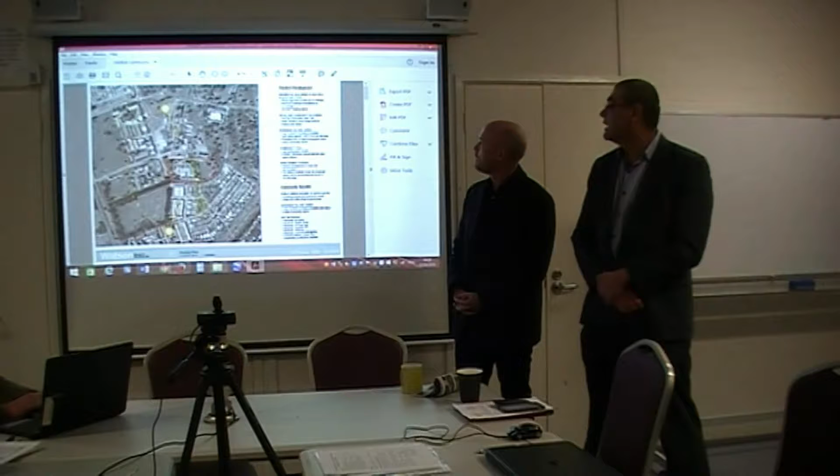This proposal relates to Block 2, Section 64 in Watson. That is the site of the Southern Cross Ten television station, on the corner of Aspinall Street - can I go down again - and Negus Crescent.

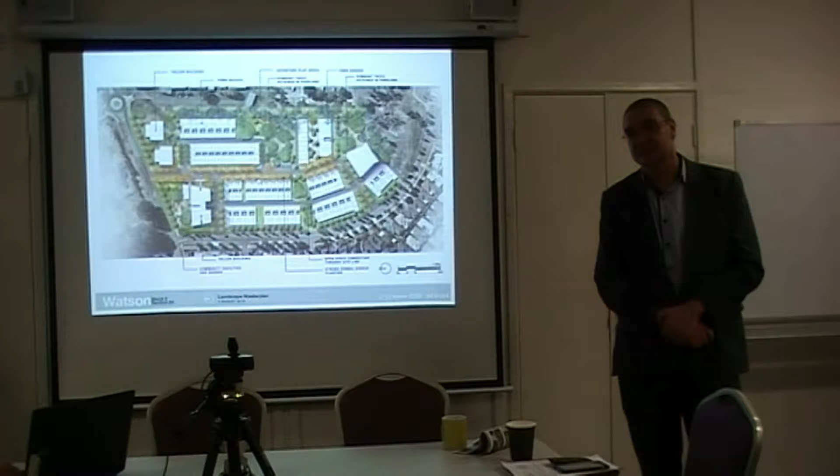The proponent has engaged both Canberra Town Planning and Cox Architecture to start working on this as a mixed-use proposal - I'll say mixed-use, meaning it's primarily a residential development with an opportunity for a little bit of commercial. It's about 4 hectares, currently has a television station as well as some vacant land towards the southern part of that.

I think I'll give Ronan an opportunity to talk to us about that in a second. What we've done to date is start doing some initial design concepts on the site. We had a drop-in session a couple of weeks ago attended by about 40 odd people, which was really good, and we got some really good feedback out of that.

We're currently working through the commentary we received and refining some design ideas. We're planning in about 3 or 4 weeks to be back at the C3 Church in North Watson for a second round of consultation with the community, to display some of the refinements and ideas we have. What we've prepared for tonight is similar to what we did a couple of weeks ago - we thought it was a great opportunity to give you guys an idea of where we are at the moment with the proposal.

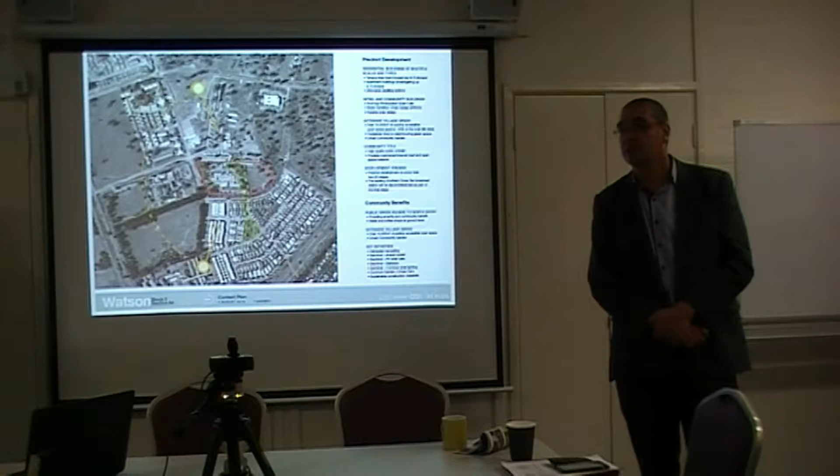So Ronan, if I can kick over to you to have a chat with us. Thanks for having us tonight. My name is Ronan Moss, I work with a company called Cox Architecture. We're working with HTI on this development in Watson.

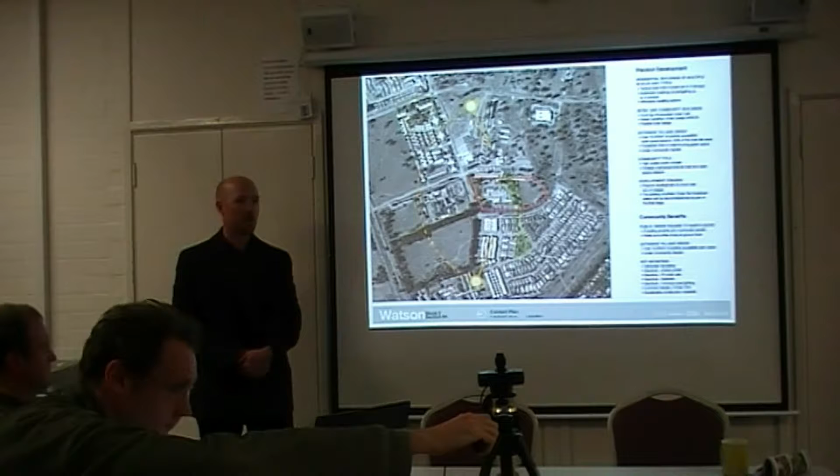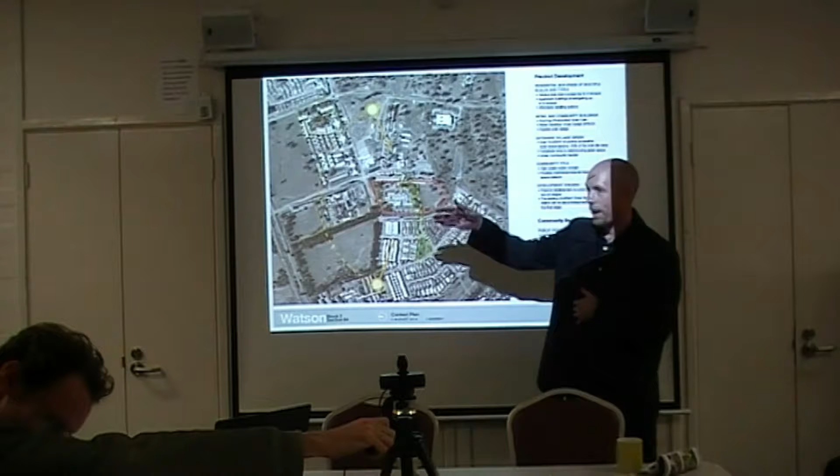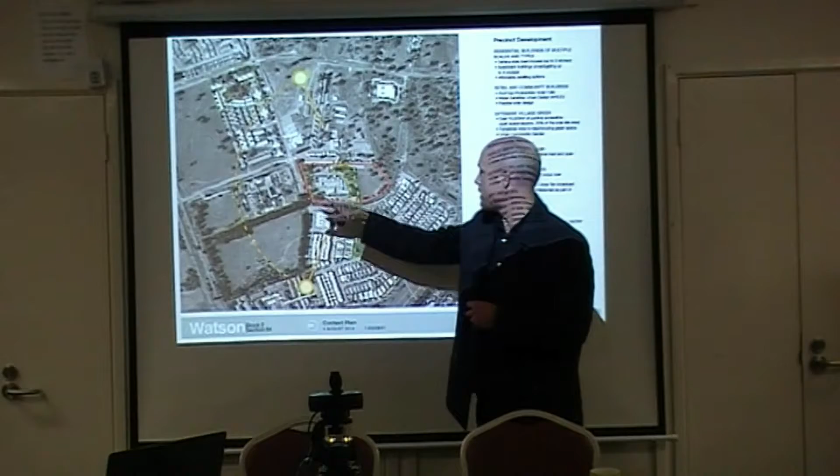Where's the federal highway? Left-hand side, over here. Oh yeah, I can see it. This is the Canberra Southern Cross 10 building - that's where the site is. Everyone know where we are? Yep. Is that top row? Is that Antill Street, Central Street? Yeah, that's Antill - the street's at the top.

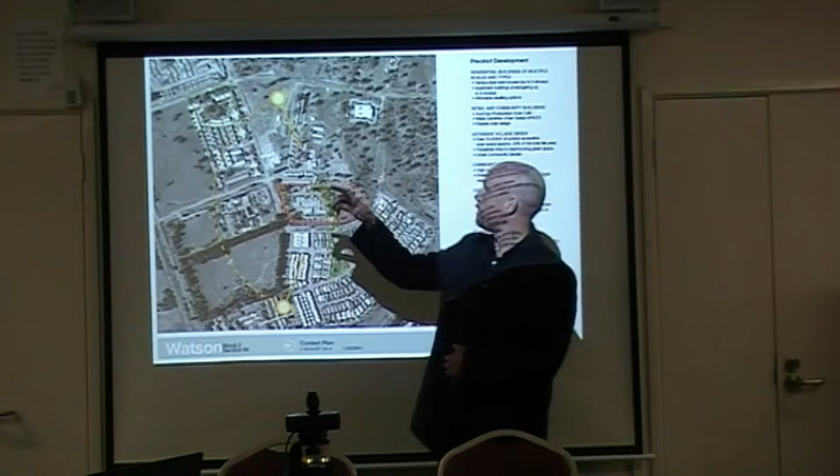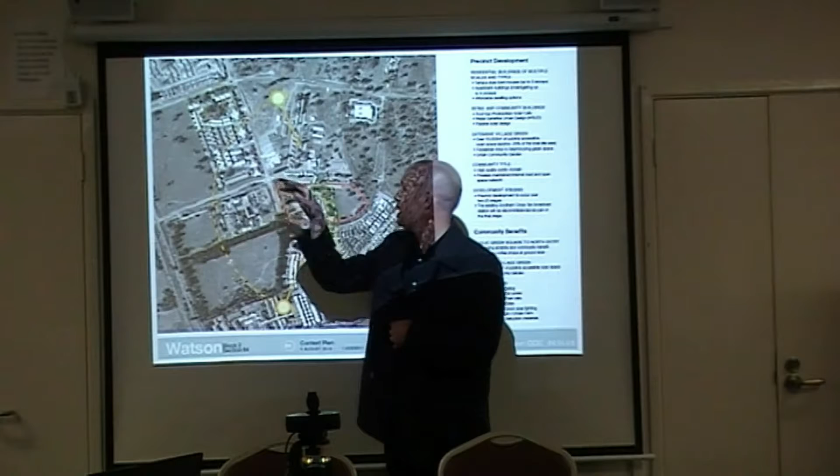To the east we have a development called the Solstice, a mixed-use development with some private open space and public recreation space. But the general area doesn't have a lot of public recreation space. I think one of the key things about this project is that the site has a lot of remnant trees, some very old trees that have been here longer than we have. So the proposal puts forward an idea where we try to retain as many of those trees as possible to create a lot of public open space.

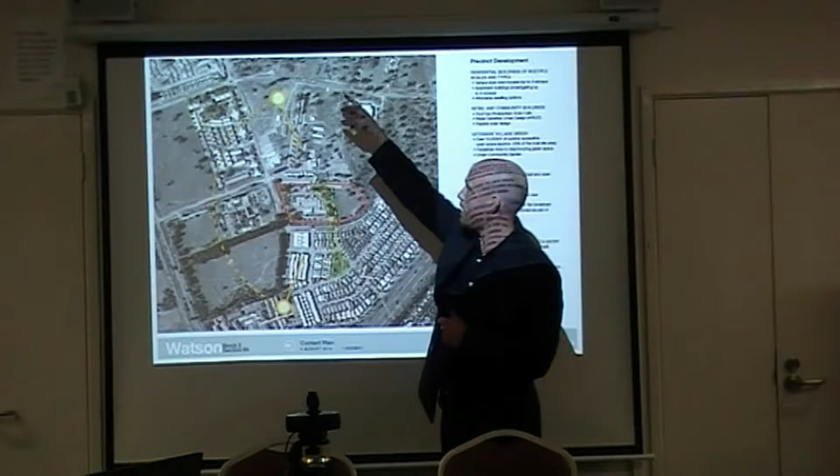A key feature of our development is this east-west connect - there's a natural overland flow path that runs east-west through here. What we're trying to do is link these natural overland flow paths so all the trees are irrigated properly and kept in their natural habitat.

We're actually trying to work with the eastern neighbour, who is also developing - there's another housing development going in to the east, and to the south there's a development as well. So we're working with the eastern neighbour to set up an east-west connect through that overland flow path to allow water to run more healthily. So a few things we should look at is just the density of the area.

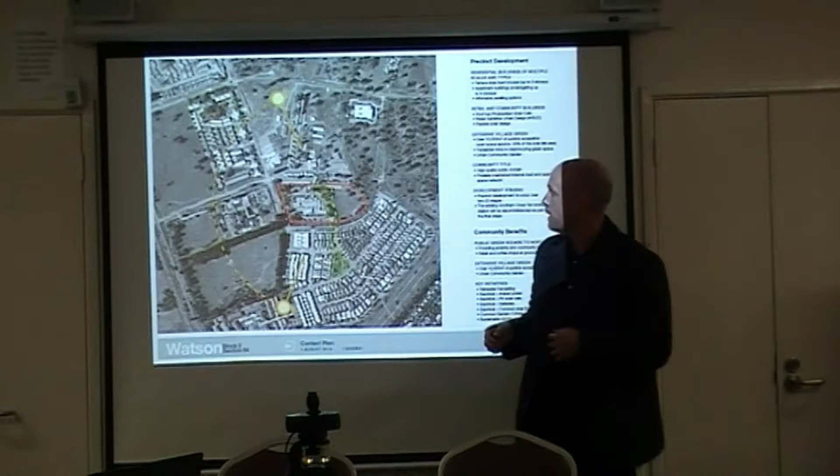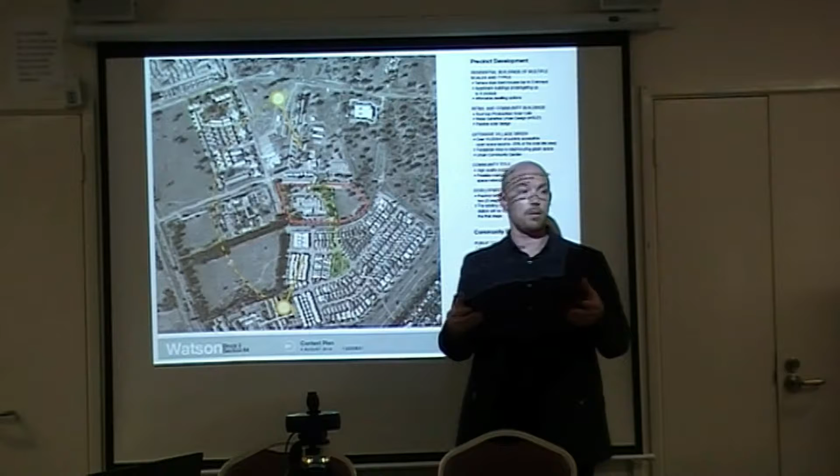So this is a typical suburban subdivision to the west of the site, and you can see that it's quite dense - 2 and 3 story houses, tight streets, generally backed by laneways for garages. The site to the east is more of a mixed-use precinct, meaning it has mixed sizes of buildings - 2 and 3 story houses, but then 4 and 5 story buildings surrounding the park.

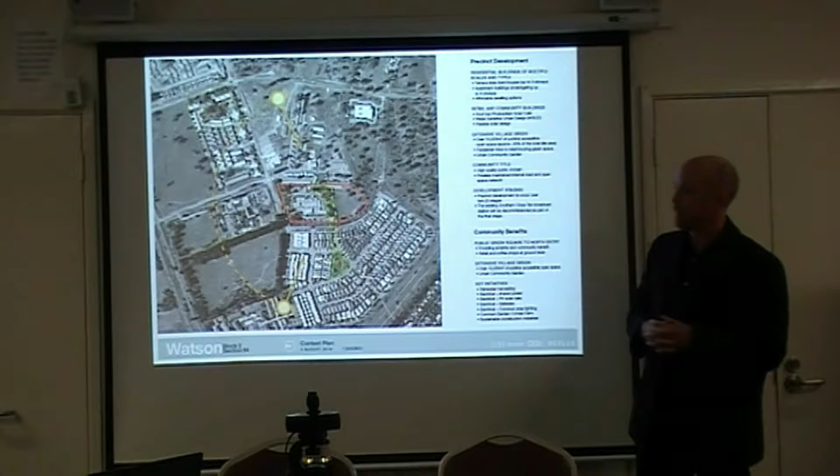So this is our development, or at least the early stages of the proposal. We presented this to the Community Council a few weeks ago. What's really noticeable about this development is that there's a lot of retained open space. When I noted the density of the developments to the west, you'll notice this development is not what you'd describe as a dense development as far as the area of building over the block itself.

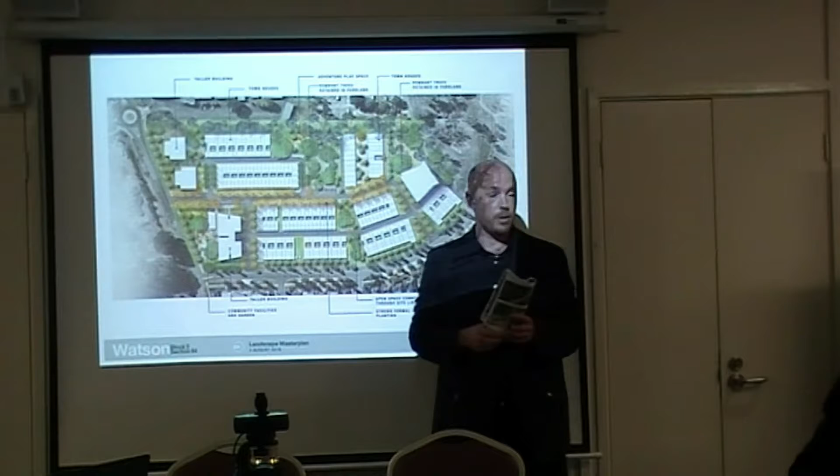There's been a strong desire to retain this east-west connection, this overland flow path, and the site is split up with a north-south road. This road is 20 metres wide, and what's key about that is it forms a really good parking street - you have a carriageway, parking on both sides, footpaths for the kids to play on, and frontages to your building. It's like a city street, so that works well.

To the northwest, we've got a building which is a community building, but also commercial and mixed-use. One of the things about Watson and the area is there's no cafe, no small commercial, no kids play areas. So this development tries to throw in some mixed uses, identifying things missing in the area and supplementing them. In this building there'll be cafe, retail, small commercial. It's north and west facing, so it has great aspect.

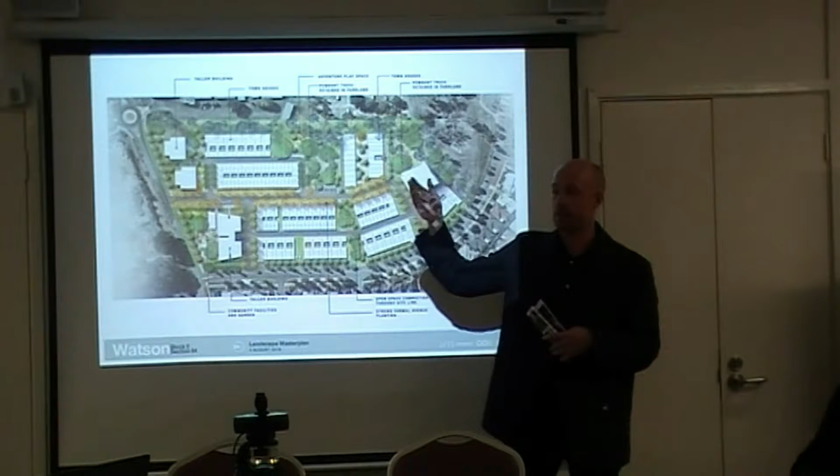You'll see that the site is broken up into a number of different building types, predominantly townhouses, which is what we're familiar with in Watson - if you go around this part of Watson, there's a lot of townhouses. There are a couple of buildings on the site taller than a townhouse, similar in size to what you might find at Solstice, up to the east. We're exploring the heights of those at the moment. Next slide.

This is a really key slide because one of the driving ideas behind this development that HCI have worked on with us is the way in which we're setting up the landscape. The landscape is a key driver. We're working with a company called Oculus - to put you in perspective, Oculus is the company that designs all the public domain works at Acton. They're a reputable company working out of Melbourne typically, and they've come here to do something similar.

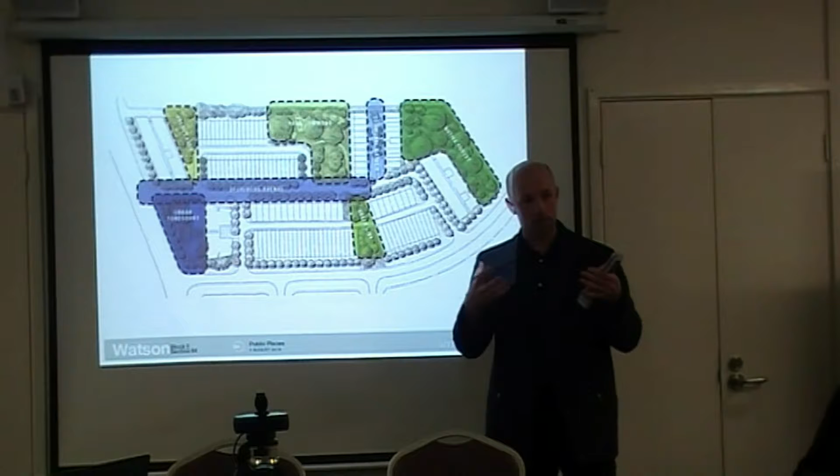It won't be as urban as Acton, but something of a similar quality. I think what's important when you're looking at a project of this size, the quality of the public domain is almost as, I'd argue even more, important than the actual quality of the buildings, because the public domain is the foundation of the buildings. A lot of these types of developments don't work because the footpaths don't work, the garbage is put in the wrong spot, and they just look messy. So working with a good landscape architect is really important.

So these are some of the key moves. There's an urban forecourt, which is the public space with the cafe, etc. Deciduous Avenue is a 20-metre wide street where kids can play on the footpaths which bind the street. There's a green link running east-west.

The Park Commons will have some sort of play space in it - we went to community consultation a few weeks ago, and one of the things they commented on was there's a lot of kids in the area, but nowhere for them to play, so this will be a play space. There's a communal garden between two buildings and a native forest, basically retaining a lot of the existing remnant trees. The total open space on this block is roughly just over 10,000 square metres - it's a 4-hectare site, and 1 hectare is open space. So there's a real drive to make it permanent.

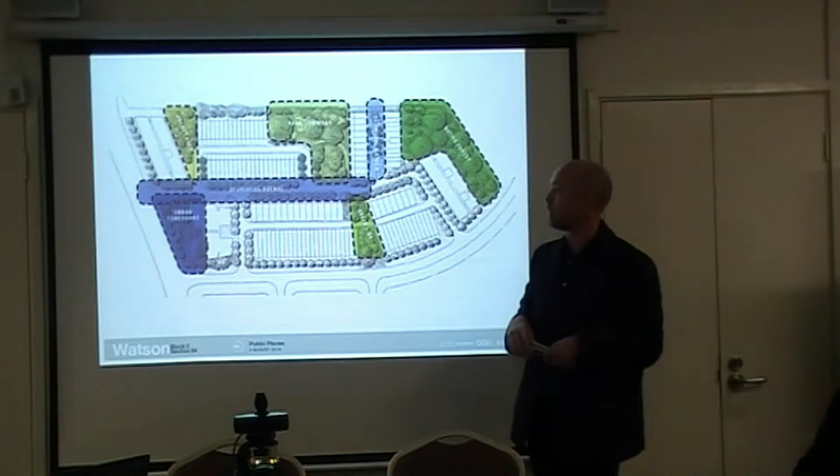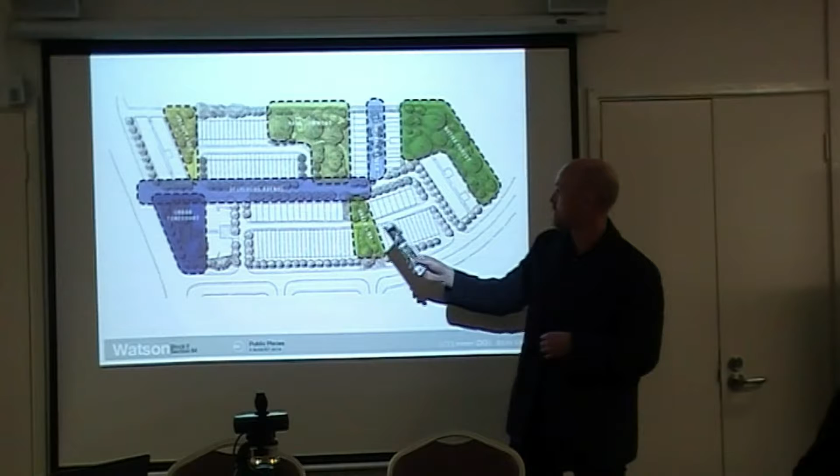The next slides - if you just go back a slide, sorry, just trying to remember where all these things are. This is the urban forecourt, this is the pocket park, Park Commons, Deciduous Avenue, Green Link, communal garden and native forest, because the next slides are just small precedents around those areas.

So this is the precedents for the housing, and these are townhouses. The first thing you should recognise is what you're seeing is a very domestic scale of building, similar to what you might find in Watson at the moment. What's curious is you're seeing typically 2- and 3-storey buildings, tightly designed, with vertical 3-storey elements mixed with 2-storey elements. This building, for instance, of a nice residential scale, is 3 storeys. So the mixture of 2 and 3 storeys in townhouses can be done very successfully, and it doesn't need to seem overbearing as far as height's concerned.

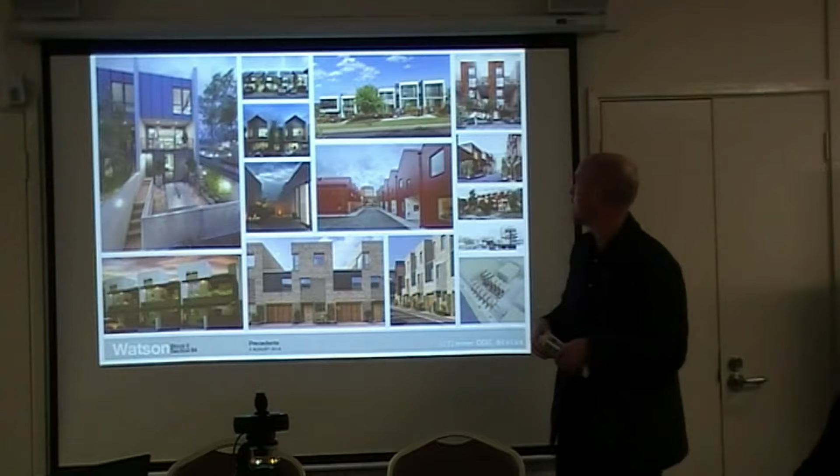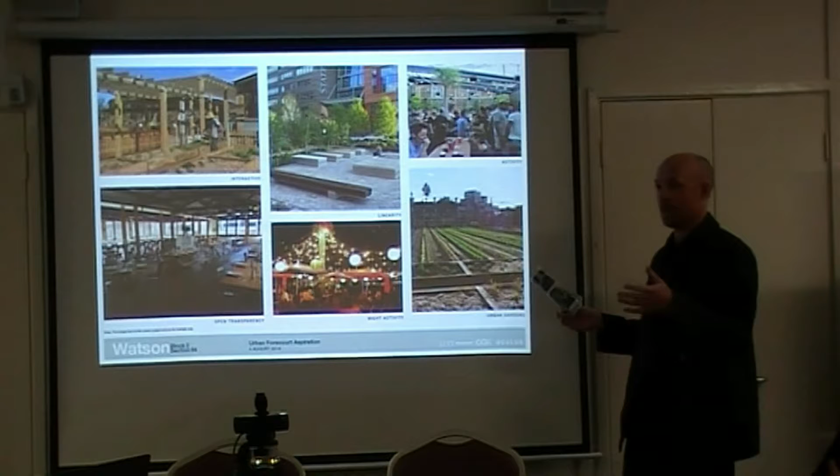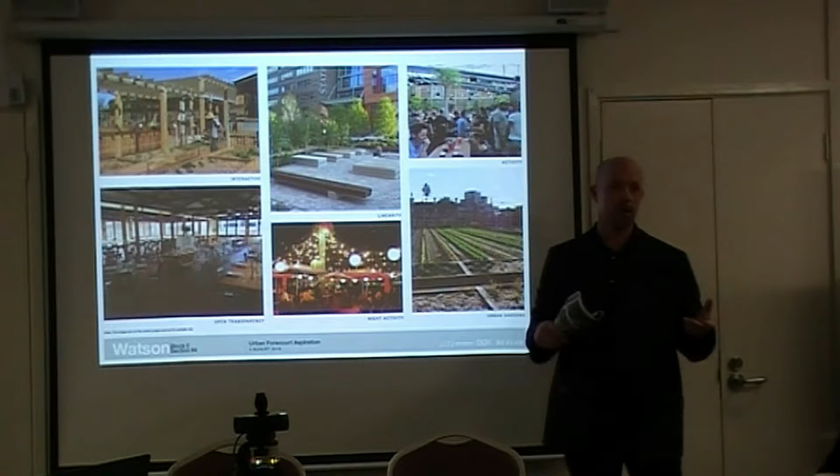This is looking at the urban forecourt aspiration. The urban forecourt is the public space on the northwest. Oculus were looking at setting up an urban farm, but we can't do that because the Crown lease doesn't have an agriculture allowance, so we're not doing the urban farm anymore. But there will be a community garden space, a spot that typically the restaurateurs will use to make their food, and I'm sure there'll be opportunities for residents to use it too. You can see the precedents they're going with - they're interested in some sort of activity, interactive and communal, a place you can be.

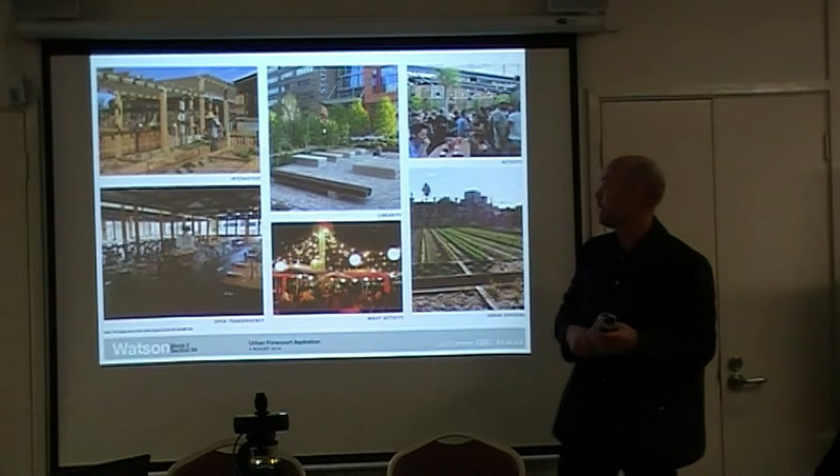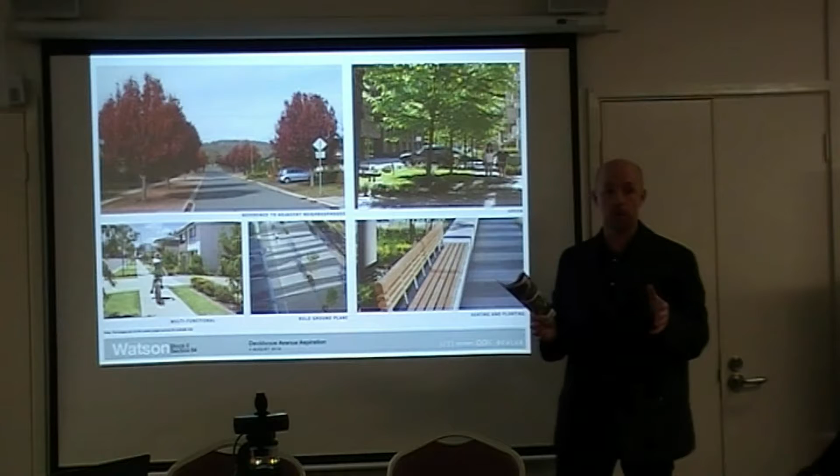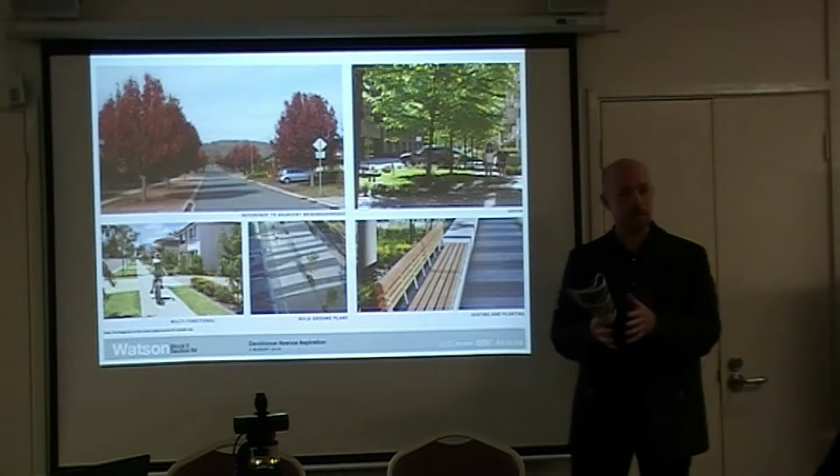This is the deciduous avenue, the 20-metre street. What's key is that a 20-metre street, like I said before, allows for parking, footpaths, and seating. They're generous streets where you can have full growth, mature trees growing on them. There are some streets built in the area, part of what we call a community title, and they're very tight - there's no space for footpaths, you have to walk on the verge. So this 20 metres allows for a lot of space.

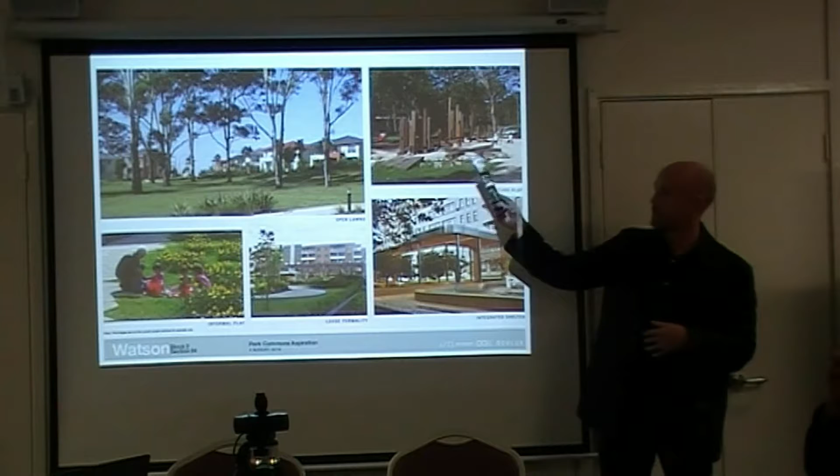Communal garden - this is one of the communal gardens between the two buildings.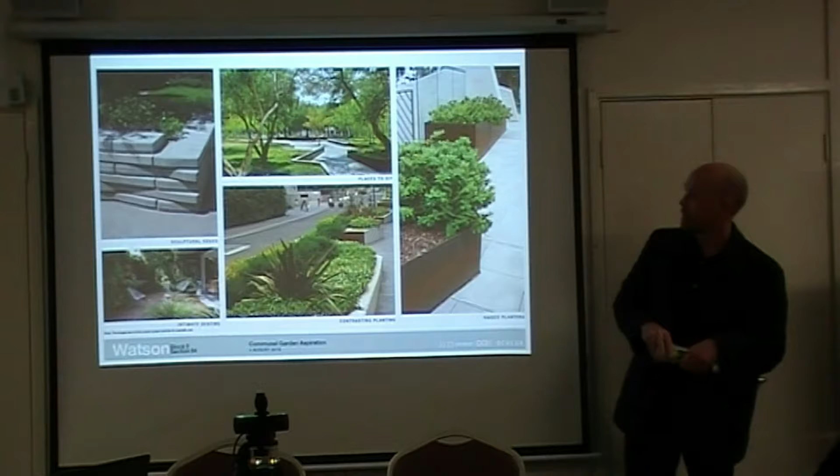Native forest is towards the back of the site, where there are a lot of trees of this scale. They're being retained, with landscaping set up around them so residents and community members can move through. We're talking about 10,000 metres of space here, so it's big - there's a lot of open space, and a desire to incorporate things so people can sit there, use it, and appreciate it.

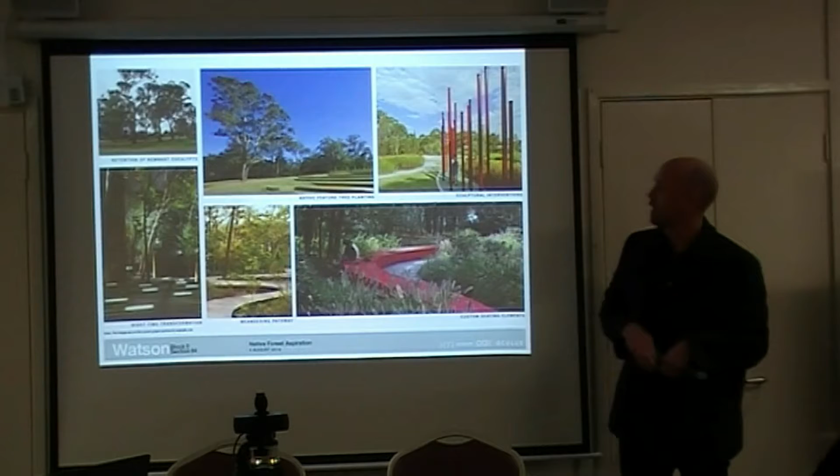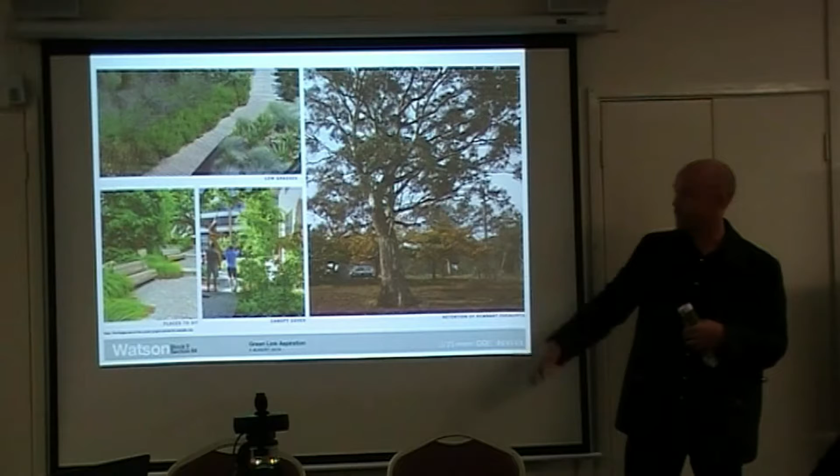And sort of are properly looked after, etc. I think that's the last slide. Oh, these are the indicative trees.

This is not my area of expertise, I've got to say, but what you have is a series of trees which will be well thought through and planted. And which ones might be invasive, potentially? As I said, it's not my area of expertise. So this is the slide that the landscape architects put forward, and he would have thought very carefully about that. But actually, what he did say is this guy here.

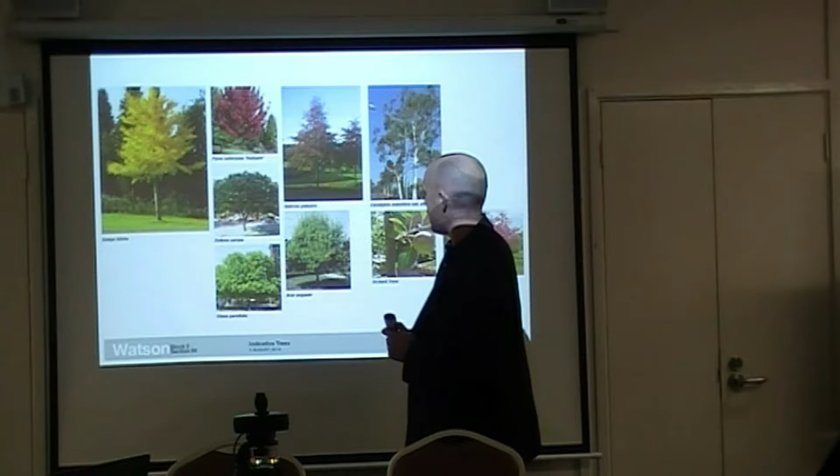The Zelkova serrata is a tree that you find on Torrens Street in Braddon. If you're interested, it's a very hardy tree, so the 20-metre street will be lined in the Zelkova serrata. It can be pruned, it can sort of work well. The issue with some of these gums, especially some on the site at the moment, is they have an issue with falling limbs. So we have to be mindful that if the main street is being used by kids riding their bikes and stuff, the trees need to be hardy and not drop limbs.

The common name for Eucalyptus mannifera subspecies maculata is brittle gum. Okay, good. So it'd be nice to see some more. It'd be great if someone could interpret this slide for me.

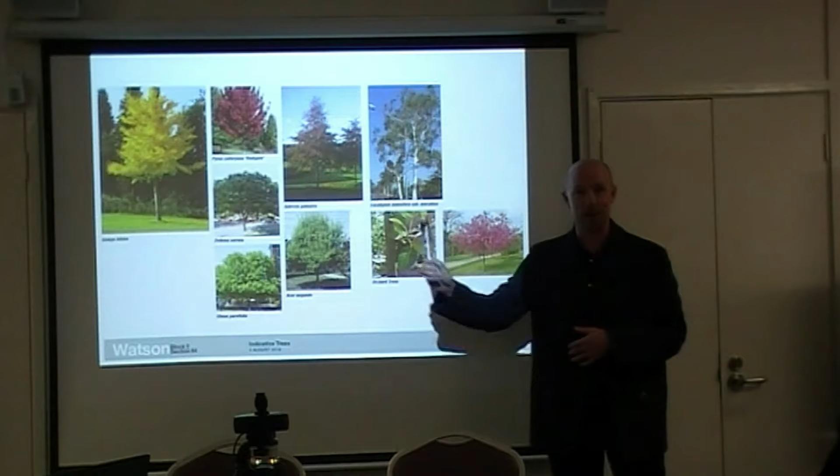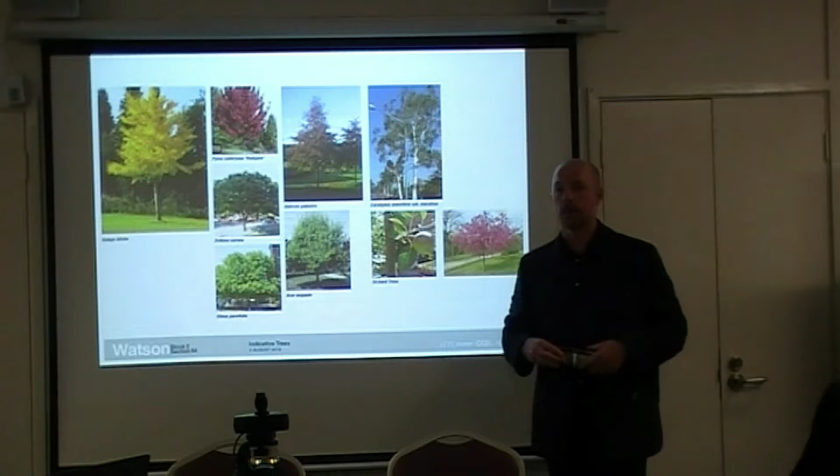My question related to, could you please ensure that there are no invasive introduced species? There's nothing invasive there. None of them are invasive? Yeah, I know my gum trees better than I know them. Okay, but I think that's a good point, we'll make sure.

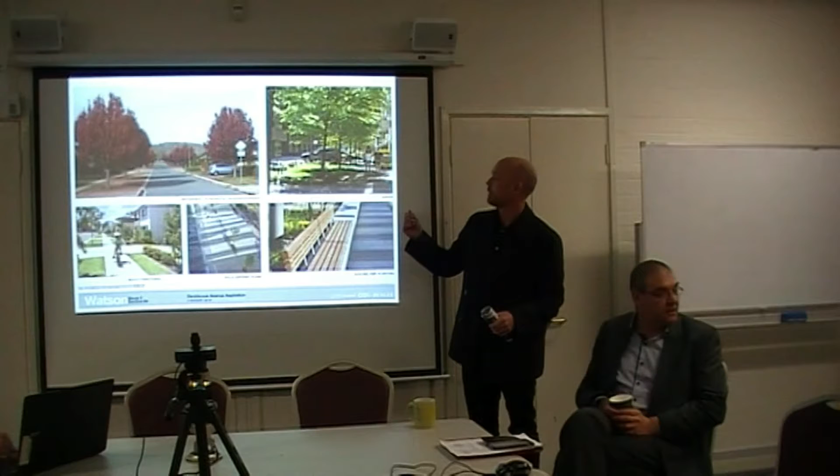What is the zoning of the site? It's only in CZ6. No residential outside, it's in CZ6 as leisure accommodation because there's a prohibition on residential being turned off. It's got, on the Watson Precinct Code, a specific overlay removing residential opportunity across the site.

So that specific overlay, when was that created? Before the current plan, this dates back to probably about 2004, which I think really was changed. It's been there for just about as long as I've been in Canberra.

So just one other thing, I should quickly go through the community benefits, because HCI is looking at doing a lot for the community with this project. There's obviously the public green square to the northwest, over 10,000 metres of publicly accessible open space, and an urban community garden which is part of the public forecourt. These are some really interesting initiatives which we should all be mindful to listen to.

Rainwater harvesting, electrical shared power, electrical PV solar cells, the use of batteries, common area lighting, common garden urban farm, and sustainable materials. I'm not sure if you're familiar with the projects HCI have done, but they're a fairly new company. There are 2 projects they're doing at the moment, and they're worth checking out.

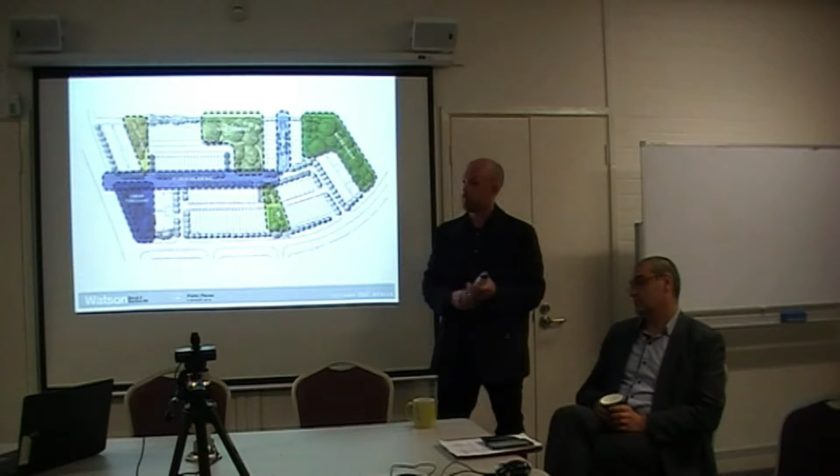Okay, look, I'm conscious of the time, so I just want to check, well, okay, lots of questions. Let's see how fast we can go. Neil?

I'm a layperson, but just looking at the design of your buildings quickly, are they all basically - you've got tall buildings on the north side, and most of the other buildings seem to be facing east-west, is that right? What's interesting is when you design a house, typically, if you face a house due north, one side gets sun and the other doesn't, and everything behind it doesn't get sun. When you face a house east to west, it gets sun in the morning, the courtyard gets sun at midday when facing north, and then it gets sun in the afternoon. So an east-west facing house is actually really efficient because you're getting, over that sort of 3 hours of direct sunlight.

So you've got some north-facing ones around that communal garden. This one here, yeah, absolutely dead north. And so why couldn't you get the rest of them facing the same? Well, because what we're doing is this.

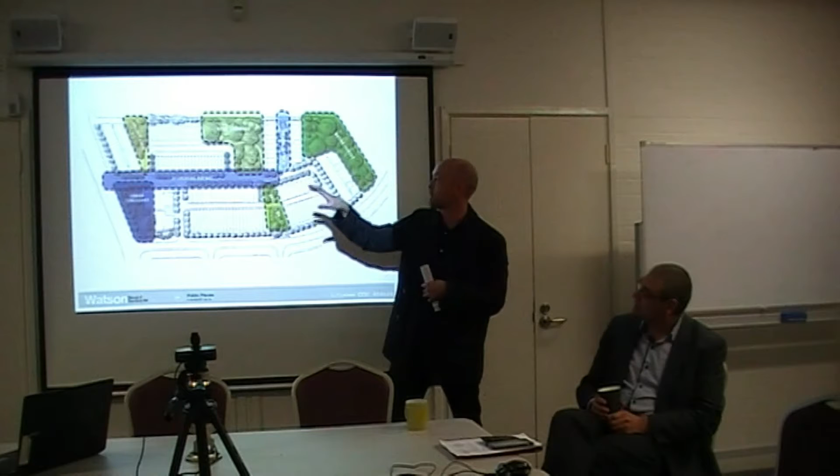What's really important about this particular diagram is these buildings fit within the landscape. We could have taken another approach and mowed down the landscape to fit the buildings in a particular way, but instead they're organised to fit within the landscape. This area works extremely well because the Park Commons has some very old remnant trees in it.

There's been a lot of thought about how we retain the landscape and how the buildings respond to that, but also on the question of solar, so that every dwelling gets a lot of sunlight. And the 8-storey buildings don't.

So there's no 8-storey buildings. One of the things we got out of our last community consultation was an exploration of the concept of height on this site, and one of the things we got out of that was that 8 storeys was probably going to be too high. So that's been reviewed as part of the design review.

What was 8 storeys too high based on? What's the rationale? I think it's based on the character of the area. If you go to the east, you've got the Solstice, which has 4 and 5 storey buildings, or a 4-storey building with 2 storeys on top. That scale of building fits well within the canopy and works. But an 8-storey building starts to hit that high point, and unless they're really well designed...

Okay, is this going to fit within the territory plan as it stands at the moment, or is it going to require changes? No, it's designed to fit within the planning rules.

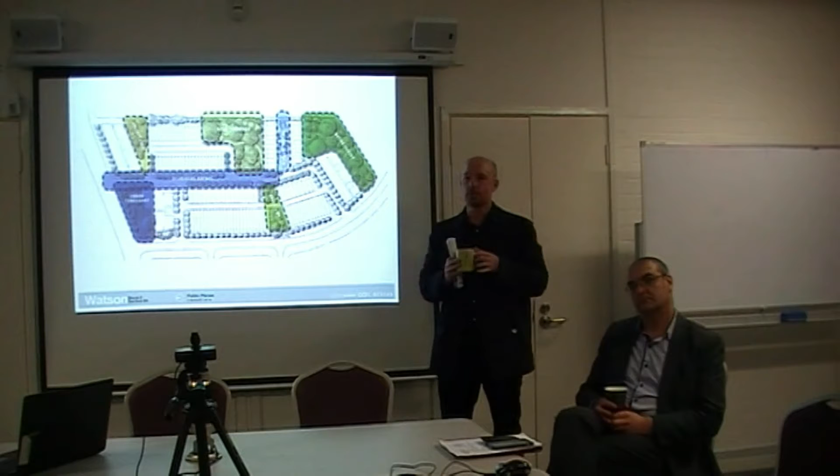My question was similar to the other gentleman's about orientation, that I thought we were aiming for passive solar orientation. If your argument is that it fits better in that particular landscape, well maybe that is the case, but it would be interesting to see the contour map of that site.

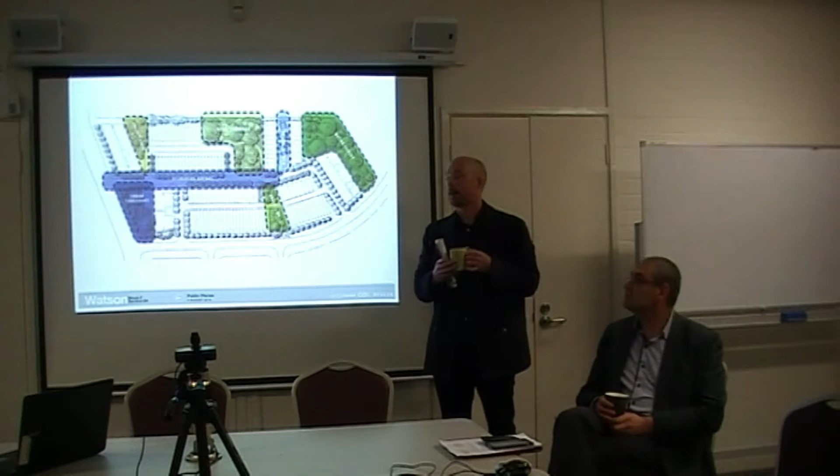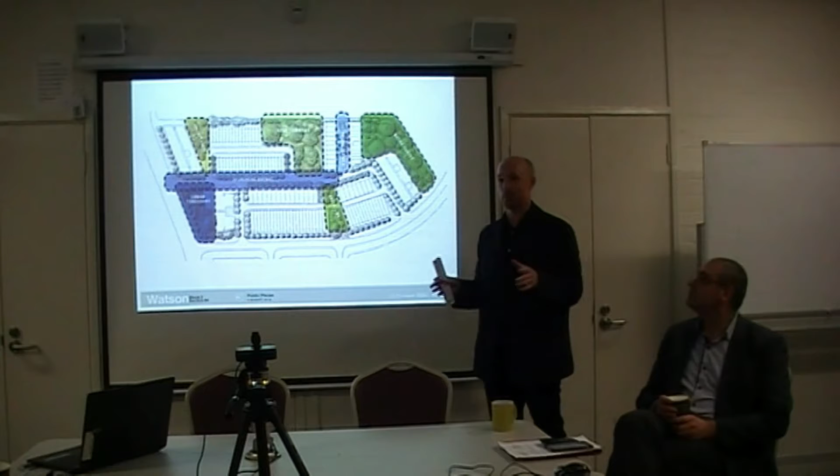Yeah, absolutely, so we're putting together a series of sun diagrams. All the apartments get north. Well, I shouldn't say every apartment, because one doesn't face north, but they've been designed so that the majority face north because they're flat plate apartments. We want them to face north and have that aspect.

All of the townhouses have a central courtyard, so that picks up northern light at midday, and then they've got east and west facing frontages. So the living spaces get morning sun and afternoon sun, and the courtyard spaces get midday sun. They're designed so they're cross ventilated, and designed in a way where you can basically track the sun and move around the house.

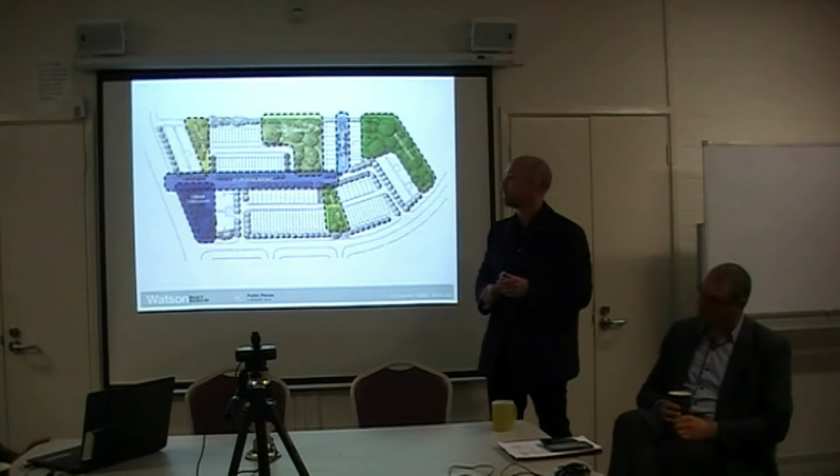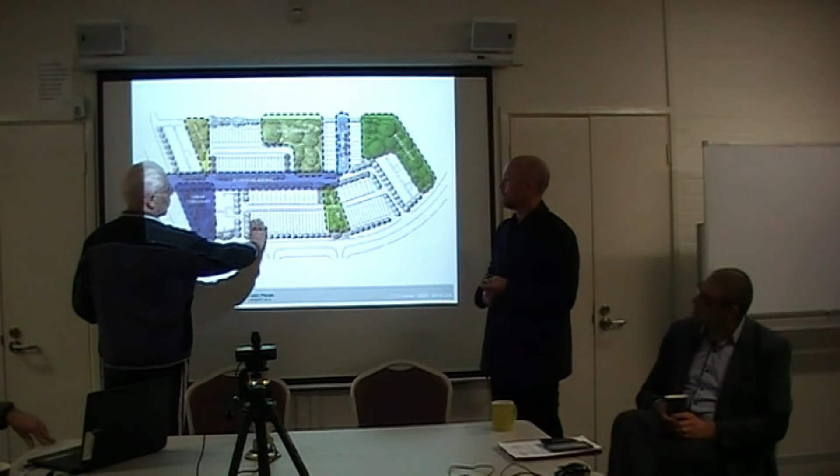Can I just clarify something again, it's solar orientation - are these the townhouses? So they're townhouses, but what's not shown here is that there's a long strip with courtyards in the middle of all of this. So this first house gets the northern sun, but all these others don't get the northern sun - they get a little bit of sun in their courtyard.

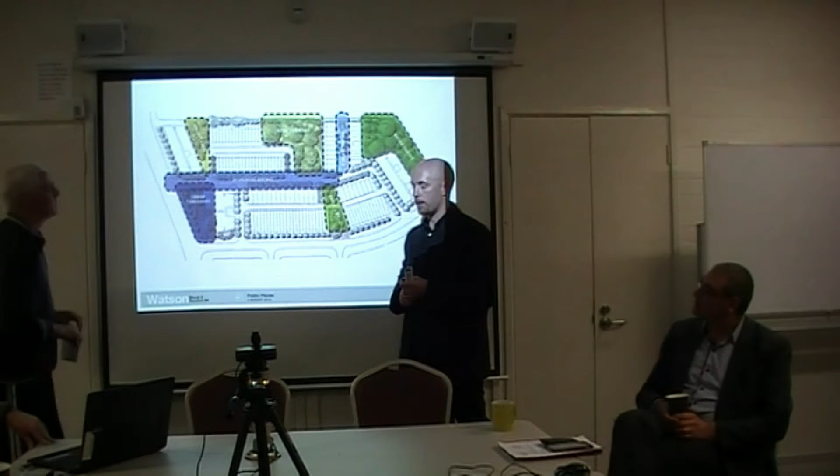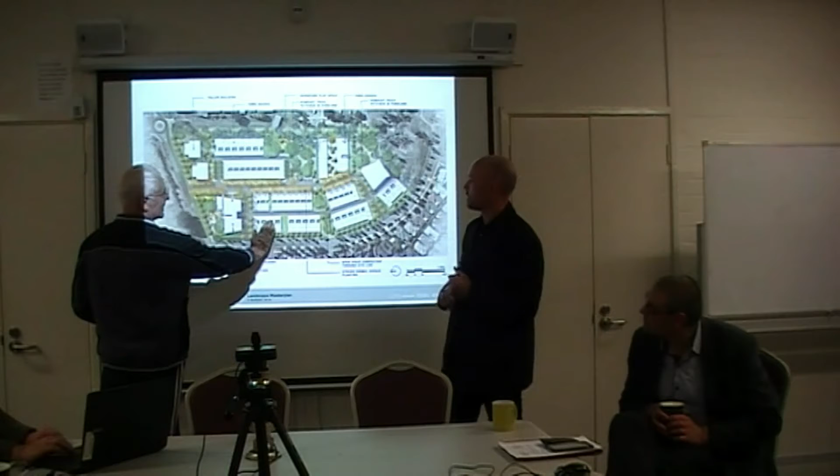Maybe go back a couple slides, or back one more slide. Yeah, so this is what it looks like. So these are two-storey buildings? Two-storey, correct, yeah. So they were getting northern sun in winter? That's correct, yeah. What were they getting as far as direct northern sun? I don't know the actual number, but...

All the dwellings get a minimum requirement of 3 hours direct sunlight. So where do they get that? It's an east-west orientation, so the sun rises in the east and sets in the west, and this is north. So they've got living areas facing - run the first slide out. Oh, the first slide? Yeah.

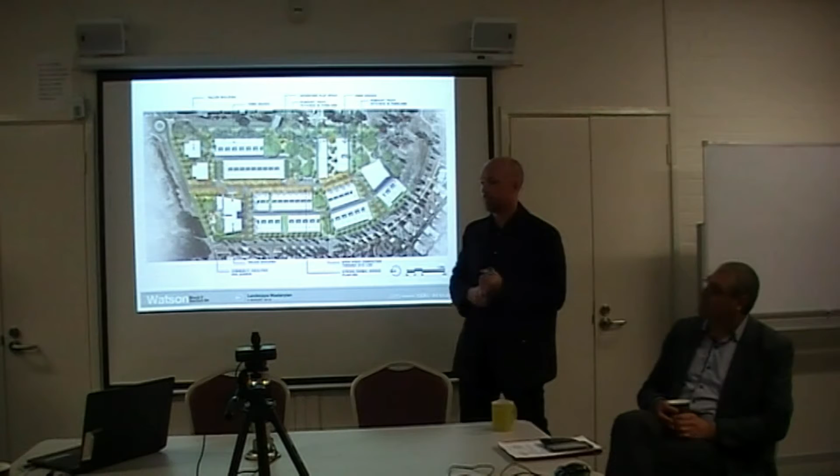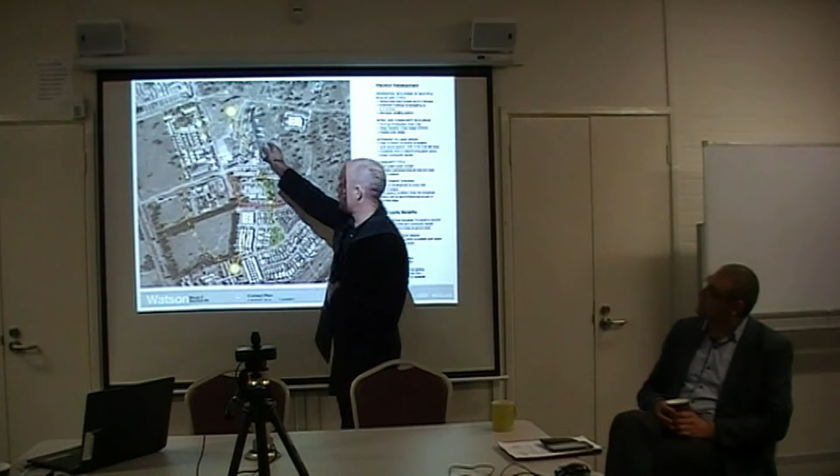Yeah, oh no, they got it. Yeah, so this is east. So the sun does this around like that.

What part of the townhouse buildings, excluding the first north-facing building, gets sun? So they all get a minimum - what part of each townhouse gets sun? There's a requirement within the territory plan that a primary living space has to get 3 hours direct sunlight.

So there'll be sunlight. At midday the courtyards have north-facing windows. Some might also have east and west-facing windows, and they have a room on the...

So what happens is the living areas through the townhouses face east and west. In the morning they get sun, and as the sun comes around to the west, they get sun from the west. On a winter's day, what do they get at midday? Oh, I couldn't tell you that right now. But has it been clarified - can this be designed?

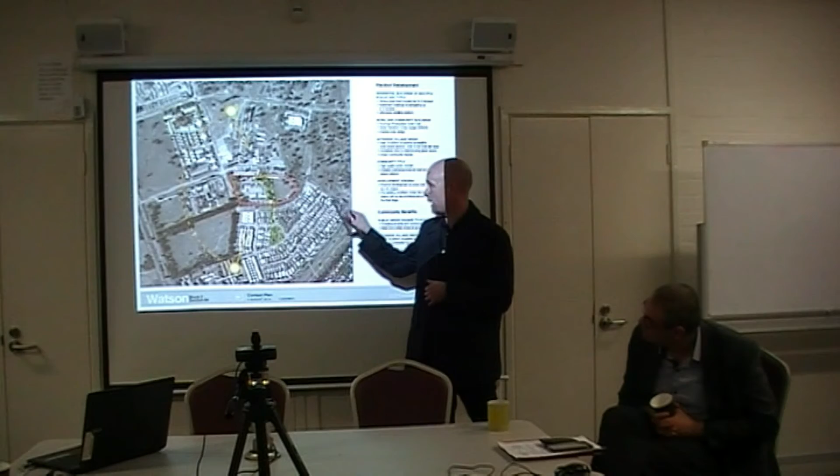I just want to go back to the solar thing very quickly and point this out. I don't know who lives here - does anyone live down here? This is a standard residential subdivision, and it's all facing kind of eastish. So what we're looking at is a situation where we've got so much public open space in our development. If we want to talk about solar access, I don't want to harp on it, but I just want to point out what's happening around us so we start to grasp what we're trying to do with our particular project.

Sorry, any more questions? Yeah, quick question - how old is that existing development you pointed out? I'm not sure, actually.